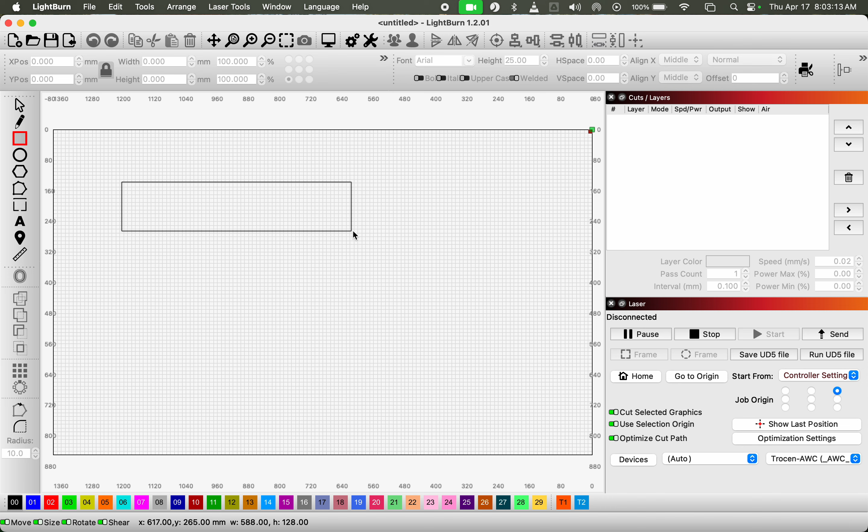So let's make an imaginary shape right here. Alright, so I've got some sort of box. Let's imagine maybe that's the piece of wood that you have to work with. And let's say I want to cut it into this oval, and I want to type physics into it. Now, at the moment, it's not particularly aesthetic because everything's kind of off-center.

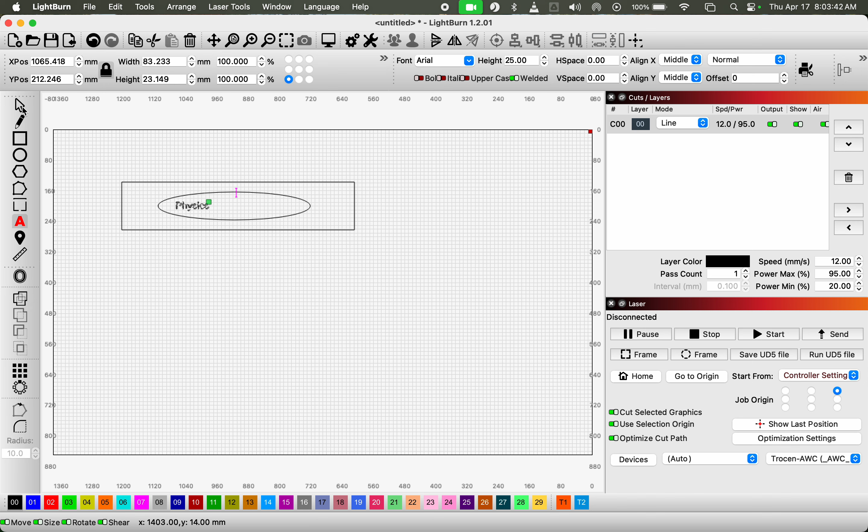So how about some things I might care about. Oh yeah, I got to be on the mouse tool. Maybe I want to center it. So if I click on this and hold Shift and click on the ring, I can go to Arrange and then Align, maybe Align Centers. You can see we did that.

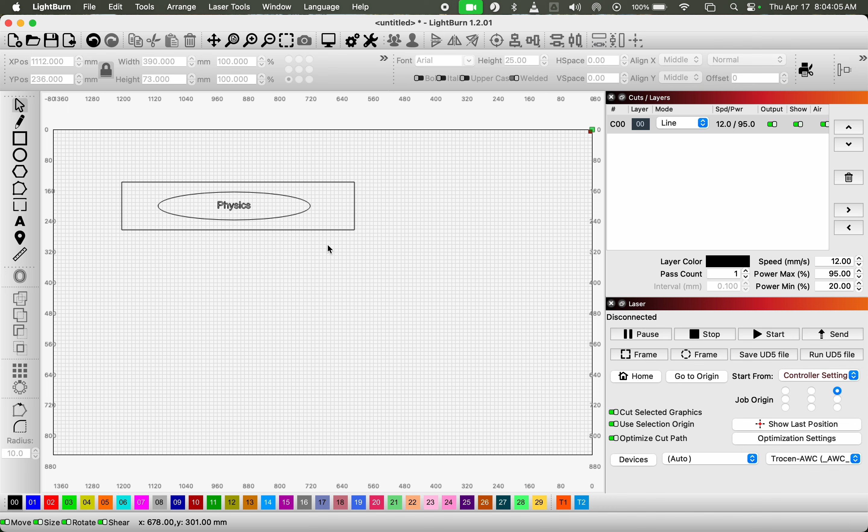And let's say that's all that we wanted to do. So I could highlight these two things. Well, I guess let's go. So I want to cut all the way through the piece of wood on this oval. So I'll click maybe blue. I look at the power settings.

Now 1295. I can show you a different document. 1295 is what goes all the way through basically most things. Let me see if I can find that for us real quick. Let's do a new window.

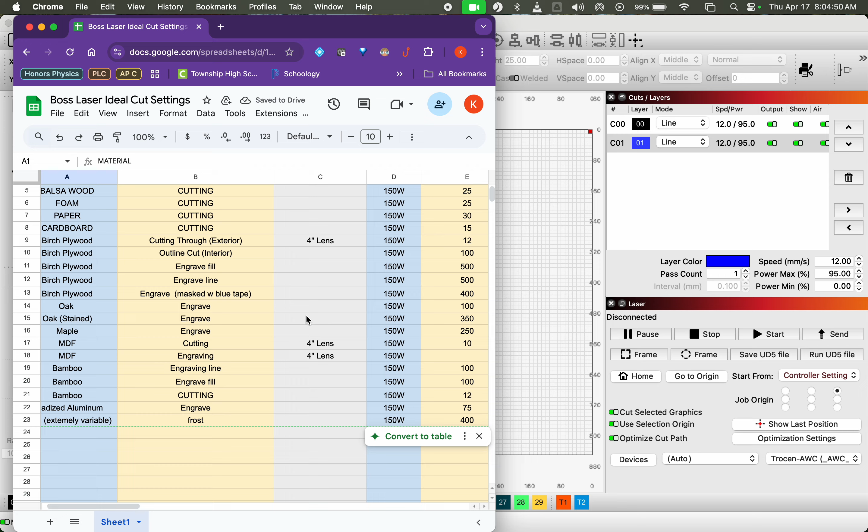Boss laser settings. This is a document that I have access to that I'm not sure if you guys would, but that's why I'll include it in the video, so you can see it right here. Alright, let's see if that needs to be any bigger.

Alright, so for instance, if you're cutting acrylic and you're wanting to engrave it, you would need to have the settings at 112. Now, we're at 1295, so we would basically engrave at the settings that we're at.

But if we're doing something like MDF, which is the kind of brown crisscross looking stuff, cutting through that would be 1090. Or, I guess this is from when I was doing a bamboo project, 1295 cuts all the way through. So 12 speed, 95 power, cut all the way through bamboo.

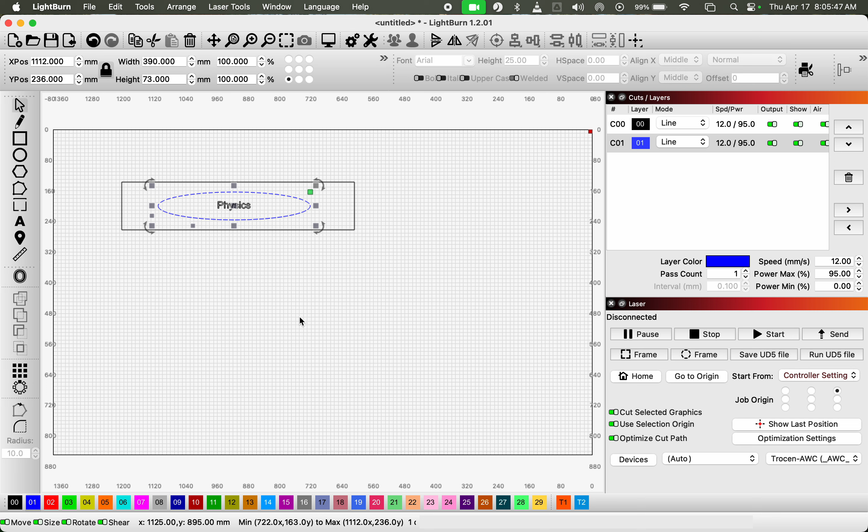So I put the outer ring on 1295. Hopefully that'll cut all the way through. Maybe I'll put this word physics on a different color, so I'll put that on red. And I do want to make sure I'm watching these output things, so maybe I'll turn on the output for red. A speed of 500 at a power of 8.5.

I think based on... 500, 8.5, let's see. 500, 8.5 was for engraving just a line on birch plywood. So again, if that was what I was doing, I would do that.

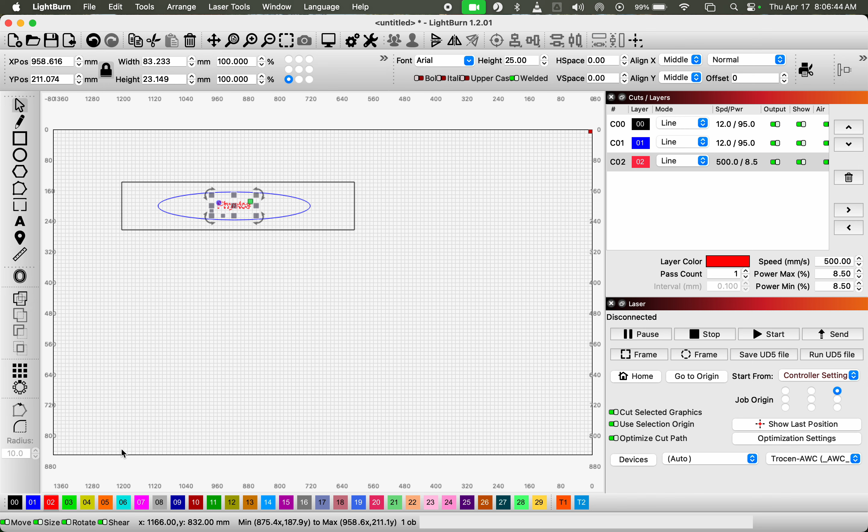For if you're making a neon sign or something like that, you probably want to do a cut on both of them. So I'll turn this one actually just to... I'll just make physics also be on the blue layer, so we'll have no red layer, just everything will cut.

And then if those are the things that we want to cut, maybe I would—oh sorry, before we get to that, sometimes it's helpful to know the size of the material that you're trying to cut on. And so up here, I pretended like this black rectangle was the piece of wood that I have.

What's nice about actually setting those dimensions, so let's say it was exactly 600 millimeters, that's 60 centimeters, and it was 200 tall.

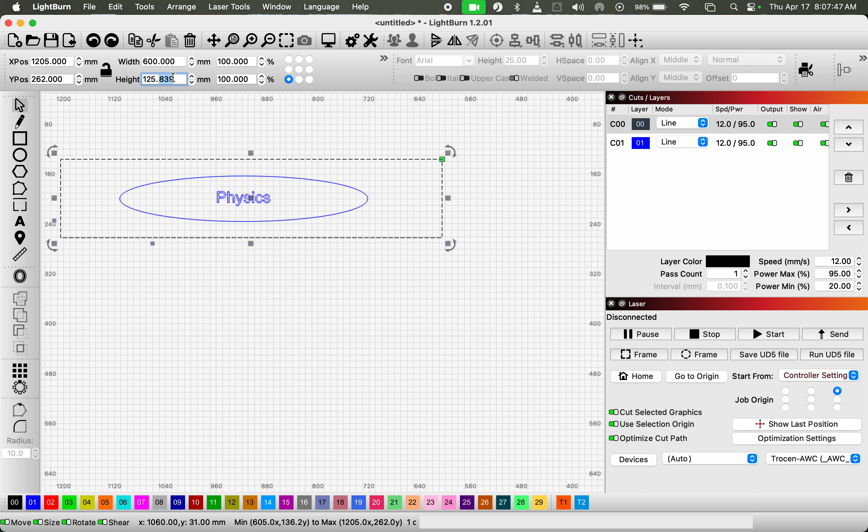Now up here where it has the lock button, that means it's going to scale everything together. So you notice that when I change that to 200, that's no longer 600. So I'll just undo real quick. I'll unlock, turn this to 200, enter, and then I can relock it if I want to.

Okay, so I'm able to see, okay, yeah, sure enough, it's fitting where I want it to fit. Maybe I want to toggle the size of this oval, I could do that up here. At the moment, I don't need to do that.

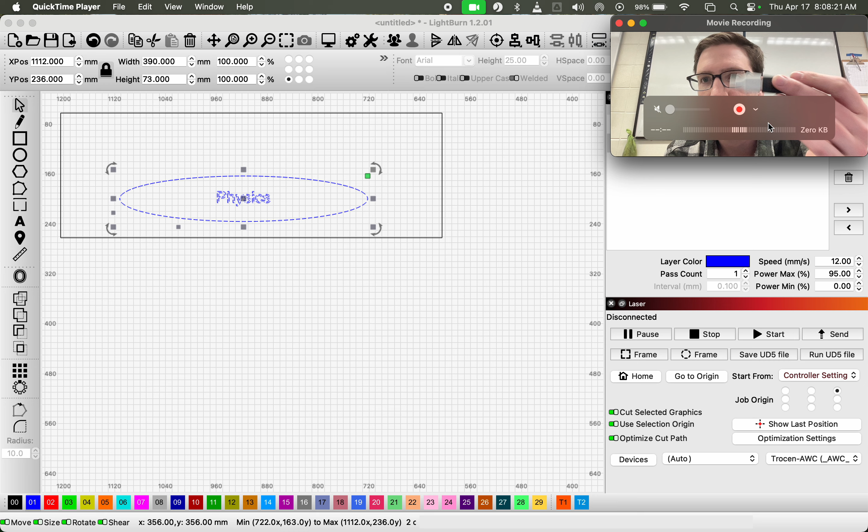So let's say I want to cut this out. I would go first, I would take a USB, plug it in. I would say save UD5 file. The UD5 file is the type of file that the laser cutter will read.

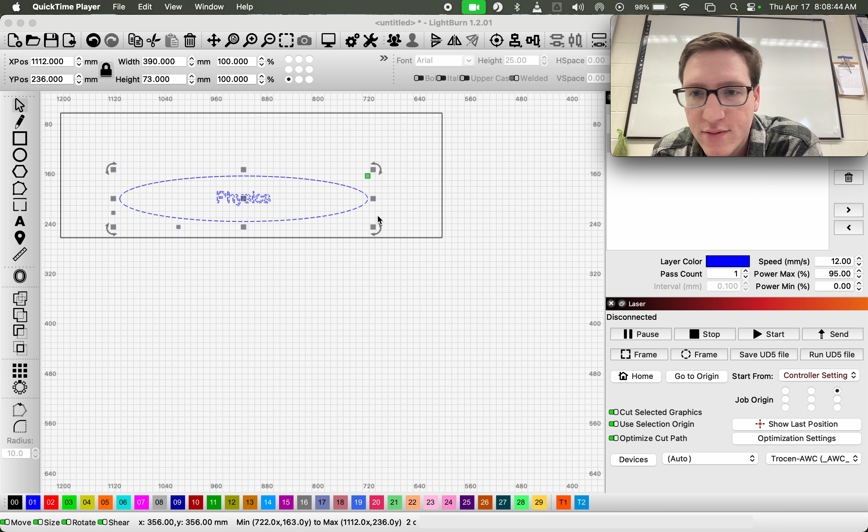At the moment I have it set on cut selected graphics, so that's why I had to highlight everything first. If I don't have that turned on, it's just going to do everything all at once. But I'll do cut selected graphics.

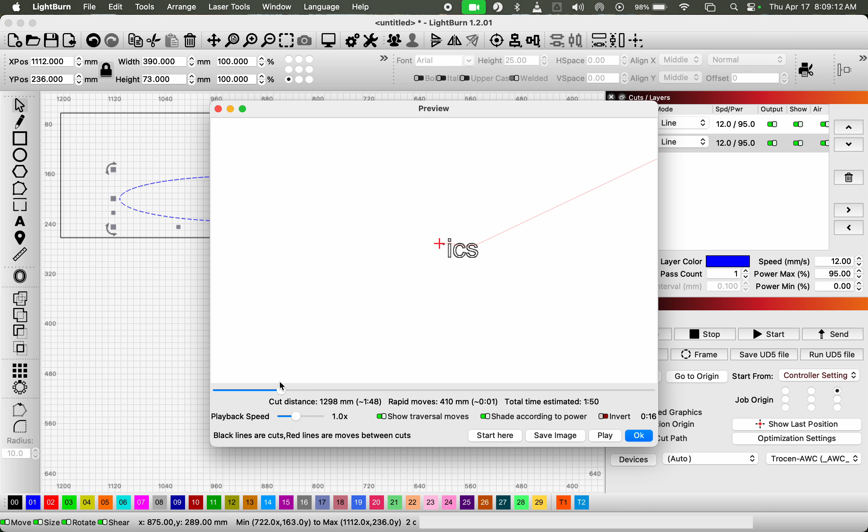If there's multiple types of cuts, we'd have to look at the layers here, but we're not really doing that in this video. Here we can go to preview and see that this is exactly what the laser is planning to do. So I always like to look at the preview before I actually hit send on it, because material can be expensive and it's hard to undo things. So I like what's going on with that.

One more thing that I'll teach us how to do real quick. So on this blue layer, I'll just double click it to get some advanced settings. It's been a little while since I've done this. Here we go, tabs and bridges.

So if you're cutting in and it'll make all of the words fall out or something like that, it can be really nice to have tabs or bridges. That means it'll cut basically everything in the full line except for these little nubs.

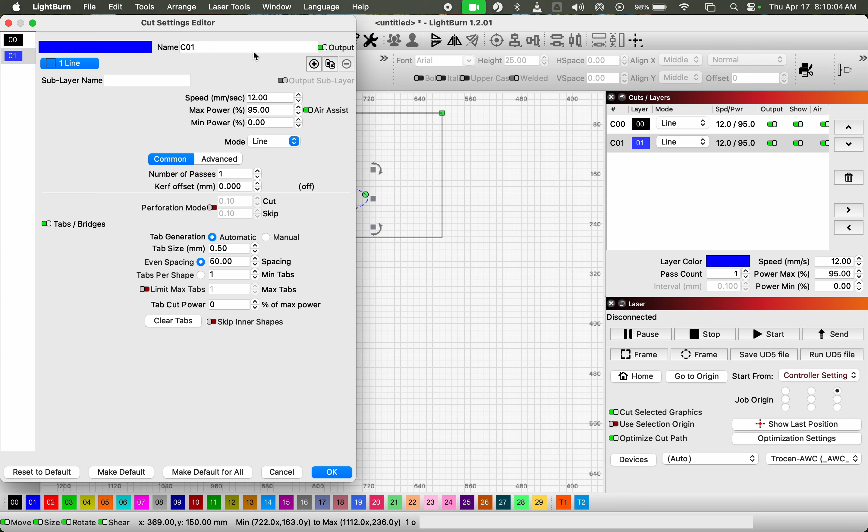So let's do some automatic tabs. So we can see all these green spots is where it would put in a tab. I don't need a ton of them. Whoops. How about per shape? I don't need a ton of them.

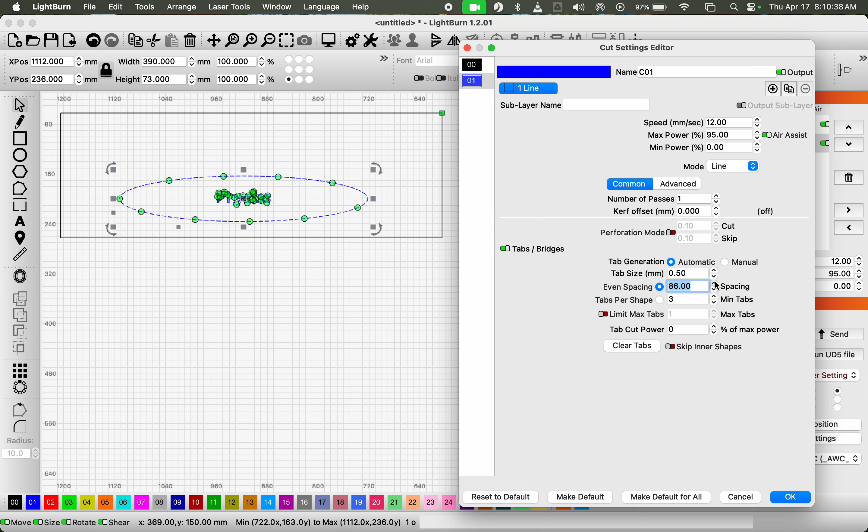Maybe I will do spacing. There we go, that's the direction I'm trying to do. I don't need them to be very big, 0.2.

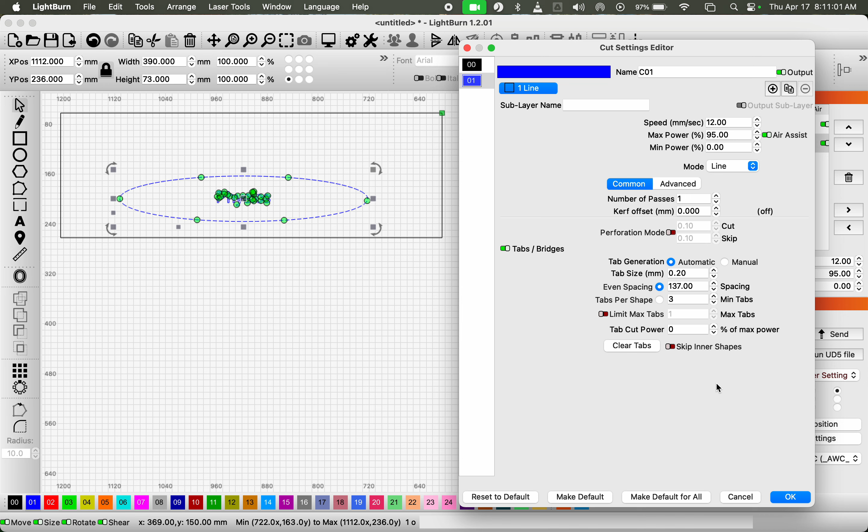These settings you might want to double check with an actual engineering teacher, they've done these more, but I'm just showing you where this menu is. So I'll say OK, then I'd say save UD5 file. It would go, I'll call this physics sign.

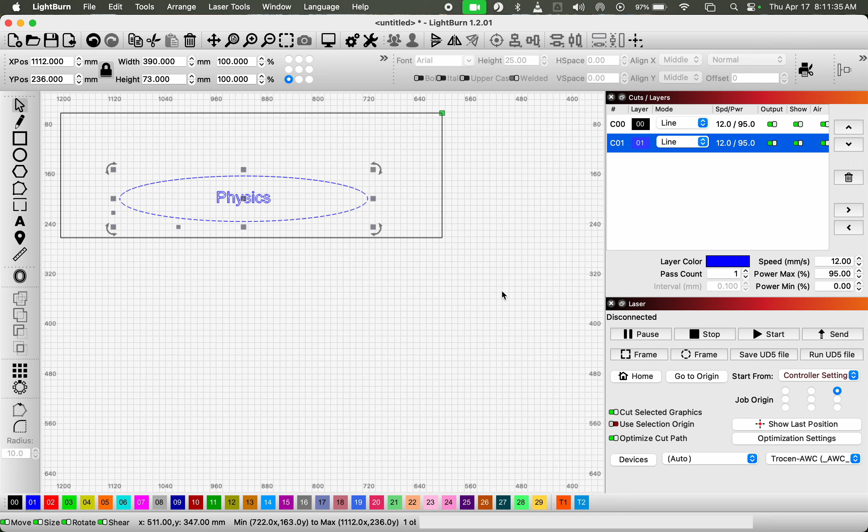Once it's saved on here, on your USB drive, you'll take the USB drive and put it into the laser, and that's where probably a different video would need to start and explain how to use the laser. But those are some basics of LightBurn. I will show you guys some more in a different video.